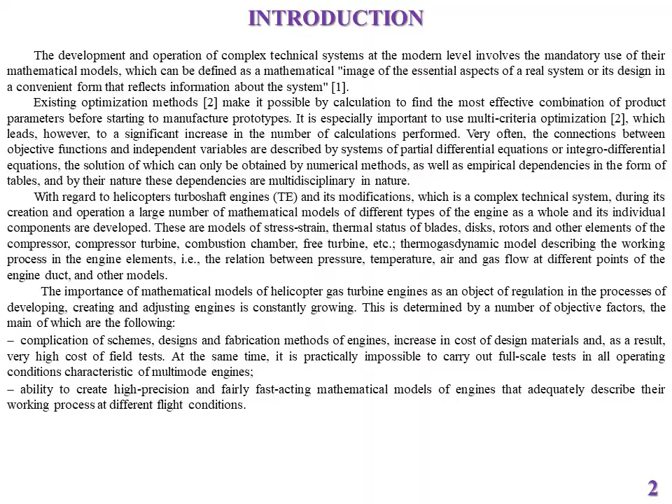The method of multicriteria optimization based on approximate models for dynamic systems was developed by Yurii Zelenkov. However, the implementation of this method is possible only at the design stage of an aircraft engine. Therefore, the actual scientific and practical task solved in this work is improvement of this method in relation to helicopter turboshaft engines at the mode of their flight operation, that is, in real time.

Analysis of even a simplified method of thermogasdynamic calculation of aircraft gas turbine engines, including helicopter turboshaft engines, shows that more than 13 parameters, independent variables, affect the definition of the working process and consequently the design of the engine. In this case, the dependencies linking the target and independent variables are nonlinear, and it is impossible to guarantee that they are differentiable functions.

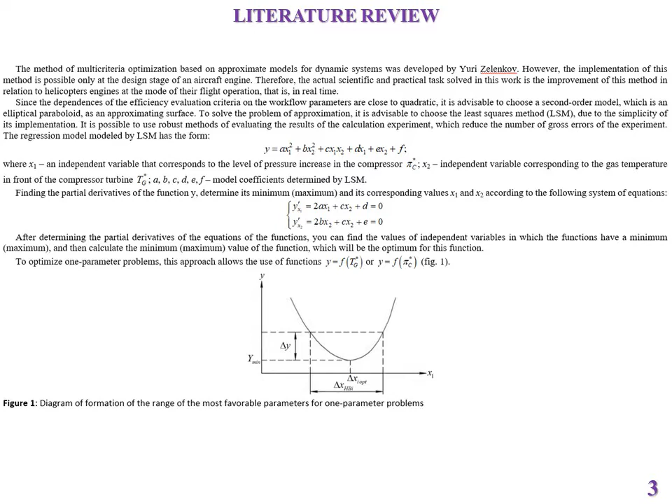Today, a number of multicriteria optimization methods are based on nonlinear programming and genetic algorithms. One of the most efficient constrained multicriteria optimization algorithms is the NSGA-II genetic algorithm. The investigated dependencies are interdisciplinary. It is impossible to guarantee the differentiability or convexity of these functions.

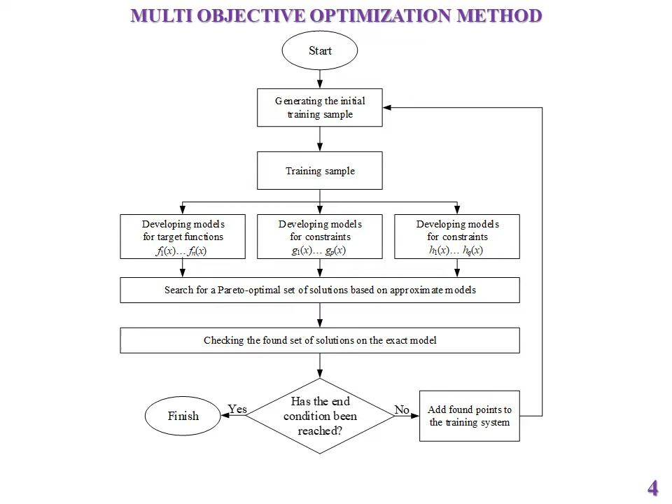In addition, when developing new products, the task is never to find the best parameters of a new product, the global Pareto optimal set, and all efforts are directed only to ensuring the specific technical requirements. Very often a solution is chosen with less efficient parameters but providing greater resistance to deviations that inevitably arise during the production process.

In the course of the work, a detailed analysis of the architectures of neural networks used in solving the problem of multicriteria optimization was carried out. The choice fell on the radial basis neural network, RBF. For RBF-network training, a gradient algorithm based on minimizing the objective function of the network error is used. In accordance with this algorithm, for each element, the values of change in the weight coefficient, element width, and element center coordinates are calculated.

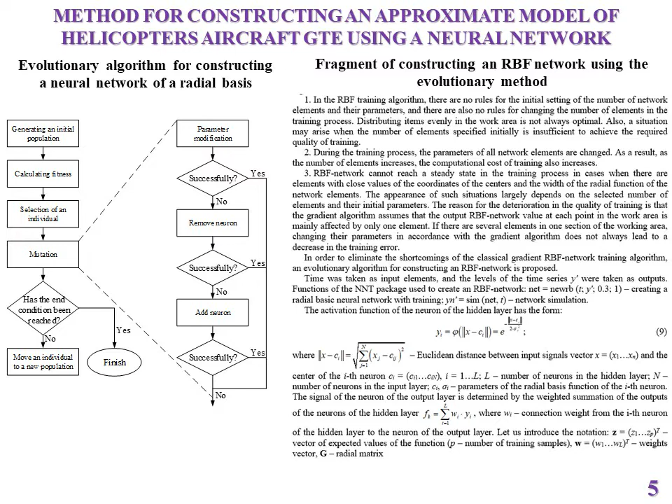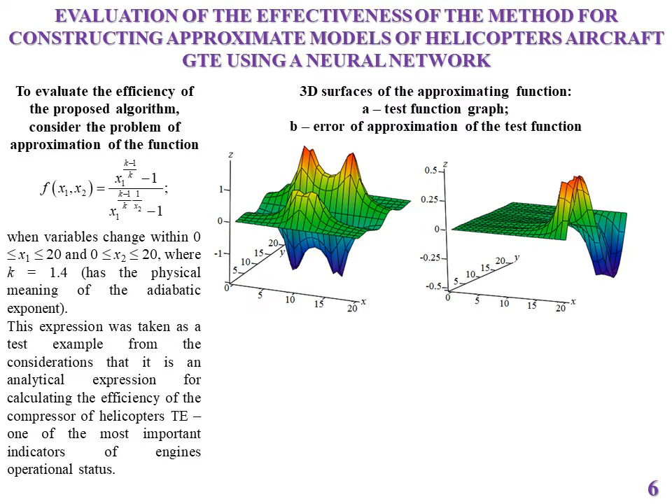The evolutionary algorithm for constructing a radial basis neural network is shown in the figure. To evaluate the efficiency of the proposed algorithm, consider the problem of approximation of the function. The diagram of the function being approximated is shown in figure A. The error of its approximation based on this method is shown in figure B. Thus, the proposed method for generating RBF networks can significantly reduce the computation time and provide more efficient networks with fewer neurons and less error compared to the traditional method.

To test the effectiveness of the proposed optimization method, we will conduct research on a linear mathematical model of the TV3117 turboshaft engine. The calculation of the parameters of the working process of the TV3117 turboshaft engine must be carried out in several sections: at the engine input, at the compressor input, behind the compressor, behind the combustion chamber, behind the compressor turbine, and behind the free turbine, shown in the figure.

The process of solving the formulated problem follows the algorithm. At the first step, a training set of 50 decision vectors X was generated in accordance with the central composite design of the experiment with centers of the faces, central composite design with face centered. Of these 50 solutions, 10 met the constraints and 8 were non-dominant.

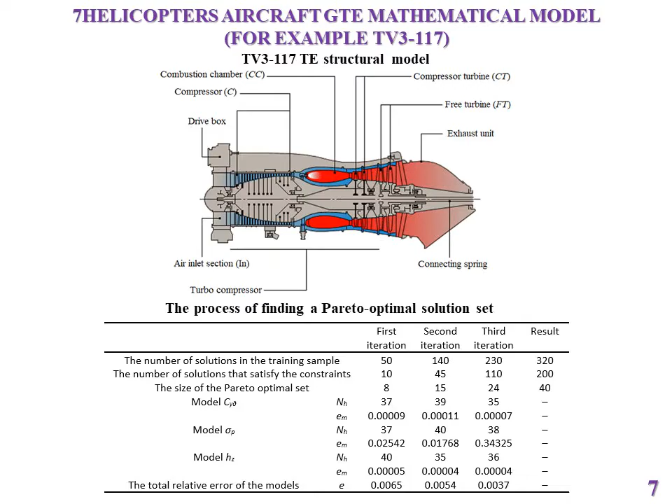Based on this sample, approximate models were built for target variables and constraints based on a radial basis neural network, in accordance with the method described above. The table for each model shows the number of neurons in the hidden layer and fitness calculated by the expression. Figure A also shows the Pareto optimal set, Pareto front, obtained by the NSGA-II method: 100 individuals in the population, 500 generations, based on the exact model. Finding this set required 50,000 calls to the minimization function.

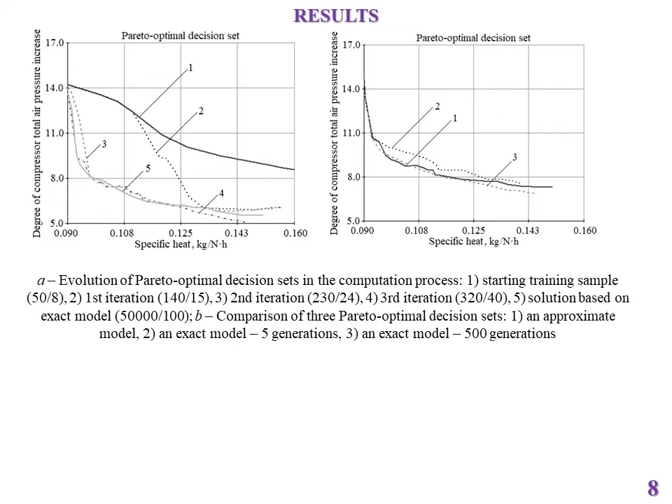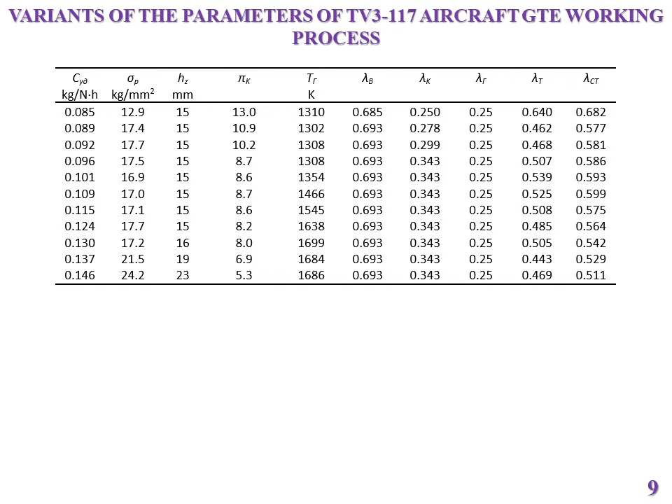And figure B shows a comparison of 3 Pareto optimal sets of solutions obtained on the basis of the approximate model proposed here, with 320 calls to the exact model, and obtained on the basis of the exact model for 500 calls, 100 individuals in the population, 5 generations, and for 50,000 calls, 100 individuals in the population, 500 generations. Some of the found Pareto optimal parameters of the working process of the TV3117 turboshaft engine are presented in the table.

The results obtained indicate that the proposed method for constructing approximate models allows reducing the amount of computing time spent on calculation in case of multicriteria optimization with constraints by more than 100 times.